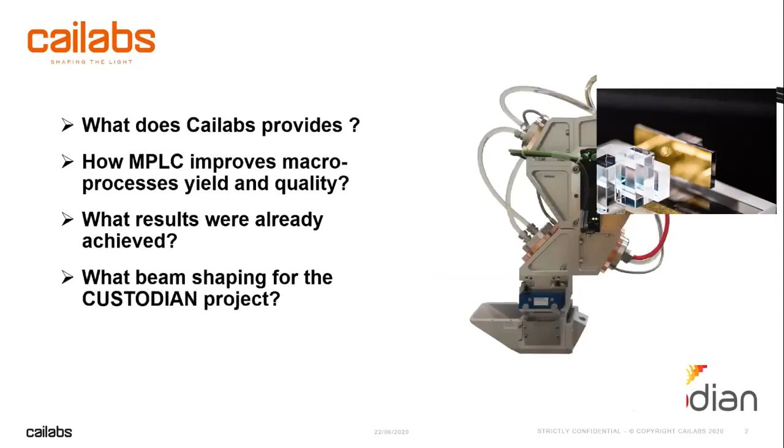So I will just shortly tell you what we at Cailabs provide, because we are here to talk about beam shaping, but what exactly do we provide in terms of beam shaping at Cailabs? I will get into our technology and talk about MPLC and how it works exactly, and how we can improve the processes. I will also let you know some results that we have already got, which are linked to the Custodian project. And I will finish by saying everything we want to do inside Custodian and what we are already doing for each of the Custodian applications.

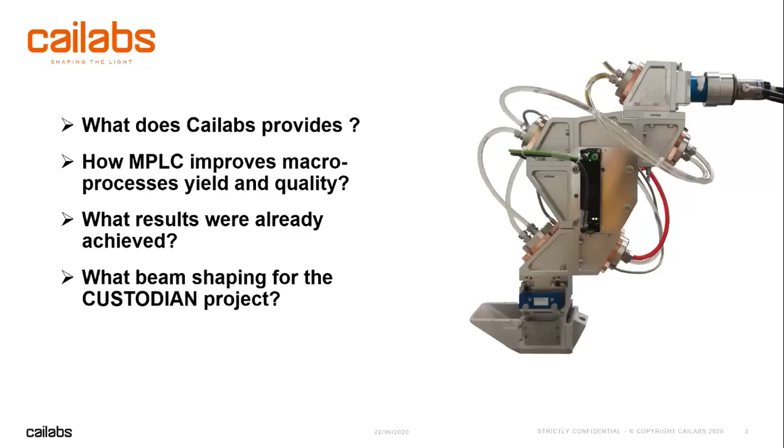So what does Cailabs provide? Well, most of you may not know us yet. We are a pretty young company. We are only 7 years old. We are based in the west of France. And we are a deep tech company, meaning that we want to really push the technology and the innovation forward. And we have developed a unique technology, which is called MPLC, for multiplane light conversion.

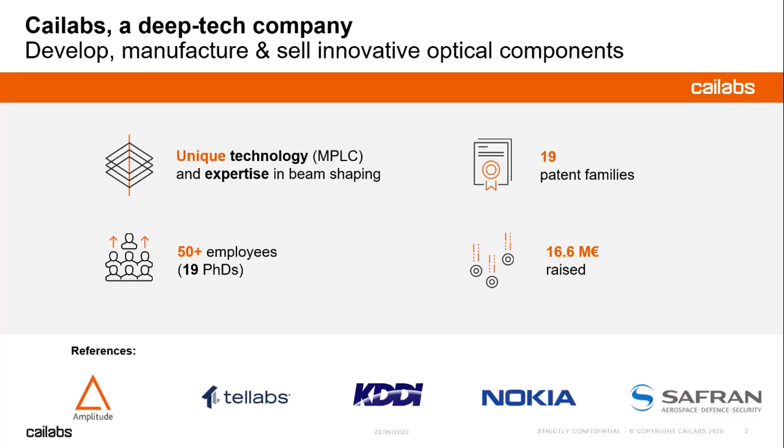We are doing beam shaping, but we don't think beam shaping similarly to other technologies. We don't work based on ray tracing. We don't work based on diffraction. We work based on mode propagation. So because it's very new, it's been patented from the beginning, and it actually enables us to do a lot of things in different applications. And many people did trust us over the years, and we did raise 17 million in the last years. So we are a little bit more than 50 now.

As I was saying, I will be quick on that, but this technology can apply to a lot of different applications. We have done a lot of telecommunication in the past. AROONA is for the local network, Proteus for the network of the future, TILBA for the telecommunication between ground and satellite, which is called free space communication. And in Cailabs, we have a lot of other applications like defense or biology. But today we are here to talk about material processing.

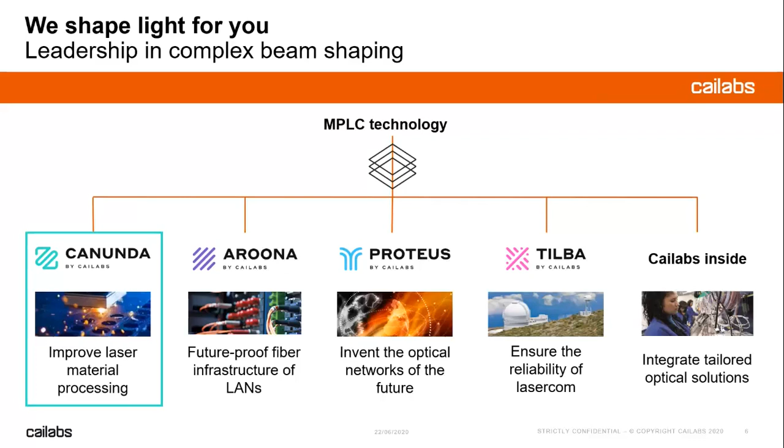So in Cailabs, we really want, with our beam shapers, to improve laser material processing, meaning whenever you have a laser in a factory or in a workshop which is processing goods, we want to look at it and see if we can improve the processes. So how do we do that? How does MPLC actually work for the improvement of the yield and quality?

Just want to quickly say that, depending on the process you want to improve, you are implementing systems which are very different. So today we are here to talk about high power applications. Everything that has been discussed is with CW high power lasers, meaning multi-kilowatt lasers. And in Cailabs, we call that CANUNDA HP. So today I will just talk about this product line and all the topics related to CANUNDA HP.

But we are also working on pulsed applications compatible with USP lasers or on Axicons for Bessel beam generation. And in every case, we are happy to discuss catalog references or custom development, as we are doing actually within Custodian.

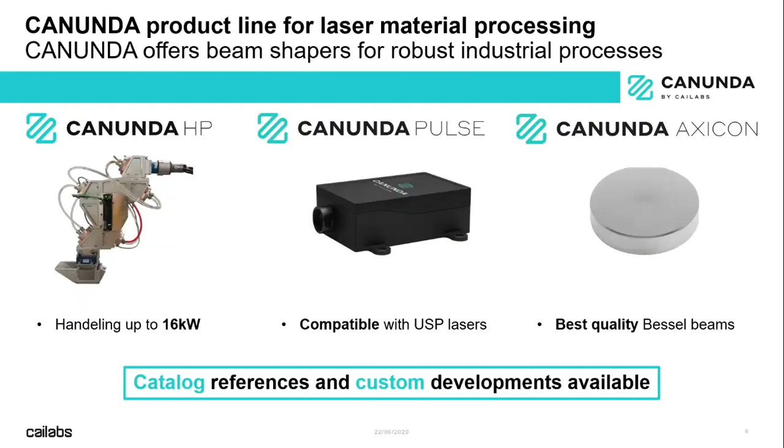Now, why beam shaping for material processing? It's been said already somehow in the previous talk from my colleagues. Actually, it's very important to have the right shape if you want to really improve any kind of process that you want to do. Here are just a few examples. For laser beam welding, for example, there is some literature. This shape is just an example, it's not the shape that we will apply in Custodian, but it's been proven that having a line and a dot behind is very helpful for laser beam welding.

In the case of Custodian, we plan to really eliminate most of the defects thanks to the beam shaping. For cutting, the shape is actually pretty different in the literature. You can have, for example, this dot with a C shape behind, and this is really improving the speed of the cutting. Within the Custodian project, we can target to actually multiply the speed by a factor of 2.

In additive manufacturing, the shapes which are looked at are pretty different. So it can be this symmetric shape. There are also non-symmetric shapes, just as my colleague from TU Vienna discussed. And the idea is actually to enable the additive manufacturing of new parts. So it's really to compare how to manufacture those parts with 3D processing compared to other technology.

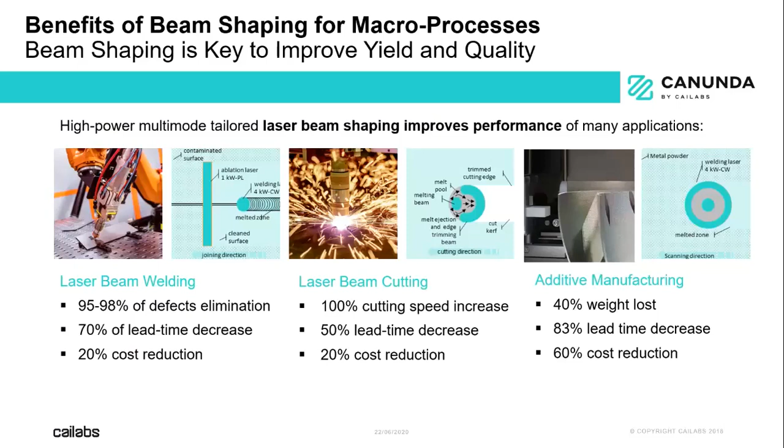What you can see here is that all the shapes are very different, very complex, and are actually non-symmetric. So they are not easy actually to make. And that's where we go to actually MPLC. If you want to do really complex shape to improve your processes, you have to be able to do really free-form beam shaping. And this is not possible with all beam shaping technology.

So what we do in Cailabs is multi-plane light conversion, meaning that actually you have a lot of planes, you have a lot of phase plates, and in between them you have propagation, as you can see on the bottom left of the screen. Because we have so many phase plates, we have really a good possibility to tune the shape that we will do with our system. So we can resolve complex equations in terms of intensity profile, meaning freeform. With a very high quality, we can reach the limit of diffraction in terms of quality.

And actually, which is very unique, we manage also to solve the equation of the phase. So we can have a plano phase where we have the shape. This is extremely important in terms of beam shaping if you want to have a robust process. Many beam shapers, they don't have a plano phase, and at the end, they have a very small depth of focus where you have the nice shape.

This system is fully passive, as you can see in the image in the middle. You don't have anything electronic to pilot it. It's therefore very robust and actually pretty easy to manipulate. Over the years, we realized that it was much more convenient to implement it in a reflective way. So that's what you can see on the picture on the bottom right. You have textured mirrors on one side, then another mirror in front, and the light is going back and forward in between both mirrors, being shaped slowly phase plate by phase plate.

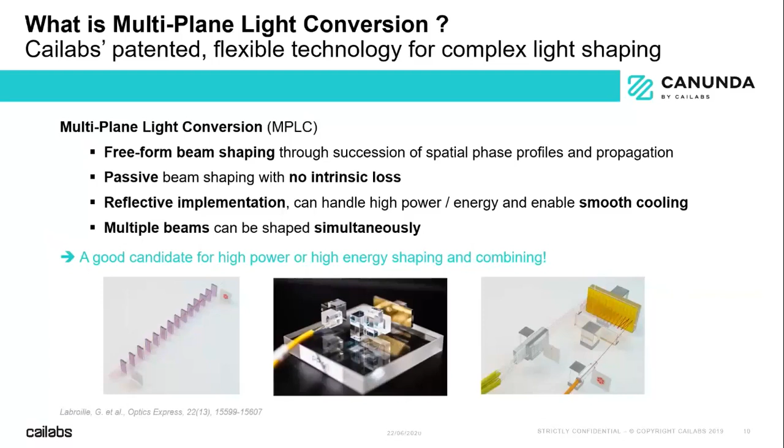One point which is actually very important sometimes for high power processes as well, we can handle multiple input and we can handle multiple output. So all this makes it a very good candidate if you want to do complex beam shaping to improve the processes. So that's what MPLC is actually providing.

Now, what results did we get already? So here actually you can see one system on the robot that we have developed, which is kind of a first step for the Custodian project. And we did manage to check a lot of different things with this system, which is very new. It was manufactured last December and tested for the first time in January. And we have some more tests with a similar system scheduled for this week. So we are really working on that to improve our design.

The idea of that system was to improve laser beam welding with a simple shape, and actually mainly to make a compact system. It's the first time at Cailabs that we do such a compact system, integrated in a robot. About a year ago, we were only doing R&D on optical benches, so it was a big improvement which we are quite proud of.

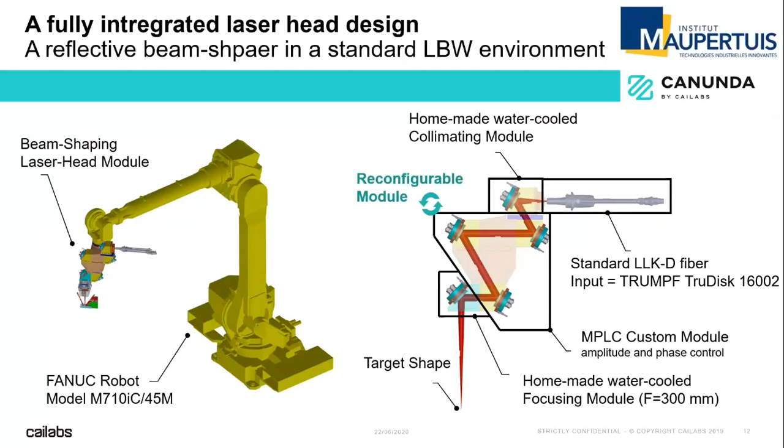We tested that with the Institut Maupertuis, an application laboratory in the west of France as well. The idea was to have a collimating mirror at the beginning in front of a standard LLKD fiber input. At the end, you have a focusing mirror, and in between you have the MPLC, the mirrors which do the shaping of the beam.

I'll go quickly through a few technical parameters we managed to achieve with the system. We had a very nice transmission, more than 99%, which was actually within the measurement precision of the system. We managed to preserve the BPP before and after the shaping, which is also very unique to MPLC technology. We also managed to reduce the focus shift.

I remind you again that this was the first time we had such an integrated system, and we already got very good results in terms of focus shift, thanks to the cooling down by the back of the optics. We plan to get even better results than that very soon. We were also able to handle really high power, and beam shapers handling 16 kilowatts are not that numerous. We were very happy to manage to handle 16 kilowatts for laser beam welding.

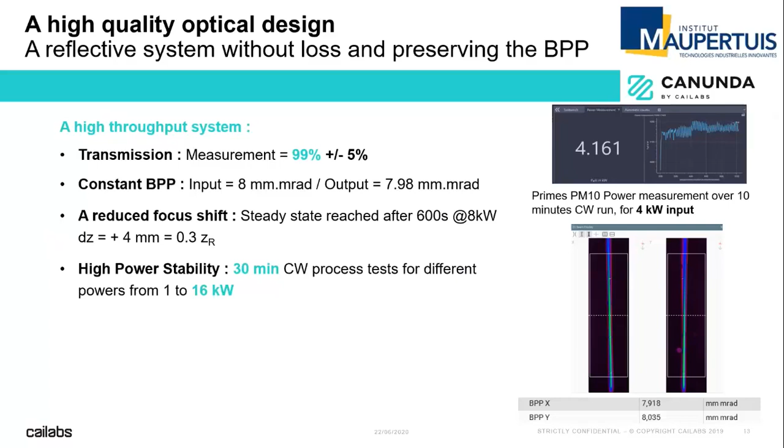Here are some of the process results that we got. You can see the video. I was also very happy to have this nice video. You still have some spatters, mainly because we don't have a protective gas shield in the system yet, didn't have time to implement it. But it was actually the first weld we did with an MPLC, and we were very happy with the quality of the weld, which is already quite nice. And as you can see, it's already integrated in the robot.

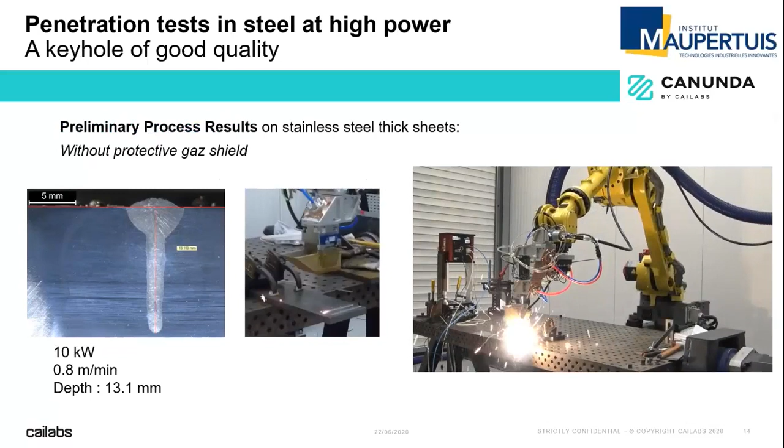So what about beam shaping for the Custodian project? I guess that's the most important part of my talk now, but everything leads to that point, and you will see the link with what we just said before.

One of the huge challenges we want to tackle with Custodian is dynamic beam shaping. It's not easy to do dynamic beam shaping, but if you want to adapt the beam during the process live, as my colleague just explained how important it is, you have to have some dynamic parameters you can use. What we want to do is based on what we call the parameter transfer feature, and it's already been proven to work well.

In the past, you have the paper named at the bottom of my slide. What you do is, for example, change a tilt at the input of the MPLC into a defocus at the output of the MPLC. It can be any kind of other parameter—you can change a tilt at the beginning of the MPLC into a shape dimension change, for example, or into the distance between the shapes that you will change. Everything is somehow possible, you just have to look into the details of what you want to do. On the right, you can see an image of what has already been done with multiple inputs, demonstrating the capability to do a dynamic system.

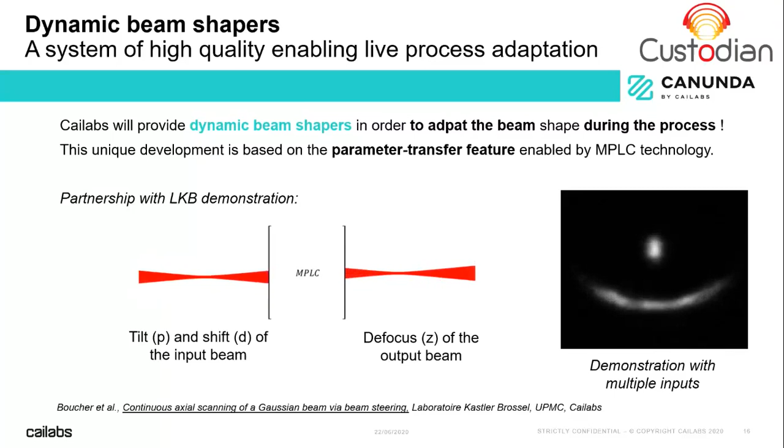Now let's talk application by application. The challenge of beam shaping for laser beam welding—there are many challenges, but I would say one of them is to be integrated in a laser head. That's why we did this project with Institut Maupertuis before, because it was a huge challenge to make something that can be integrated in a robot, which is compact, light, and can handle the speed of an arm robot.

So we are very happy that on that point we did actually good improvements. We have to be compatible with a Precitec welding head, and it has to be an add-on which is easy to integrate. So it's a challenge that we have to meet as well, but we are already working very well within the Custodian project to tackle that point. Now it has also to integrate an inline control of the process. It is also a challenge, but this will be discussed later on during the webinar.

The shape that we will target is a complex non-symmetric shape. This is difficult, and not all beam shapers enable that. So the idea is to initiate the melt with, as Rodrigo was mentioning, a first point or main beam, and then to control the melt pool with a secondary beam. All that we will do while preserving the high depth of focus, which is extremely important if you want to do welding through a large, thick material. And last but not least, this has to be dynamic so that we can adapt the process live. So it's going to be a very nice shape that we will do for laser beam welding.

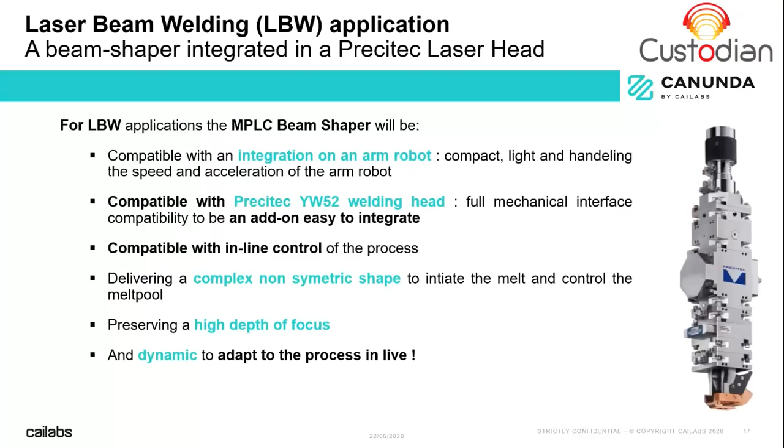For LPBF application, the challenge will be very different. We don't have to be integrated in a laser head, but we have to be integrated in a machine. On the bottom right, you can see how we plan to do that. We will have to have a very long propagation, and we will have to have a very flexible system in order to test different shapes. As you saw also on Rodrigo's presentation, there is actually a huge number of possibilities which can work for LPBF. So we try to have a flexible system which enables testing different shapes to improve the process. Again, we will preserve the depth of focus, even if it's actually less important for LPBF than for laser beam welding. And it has to be dynamic for the live control of the process.

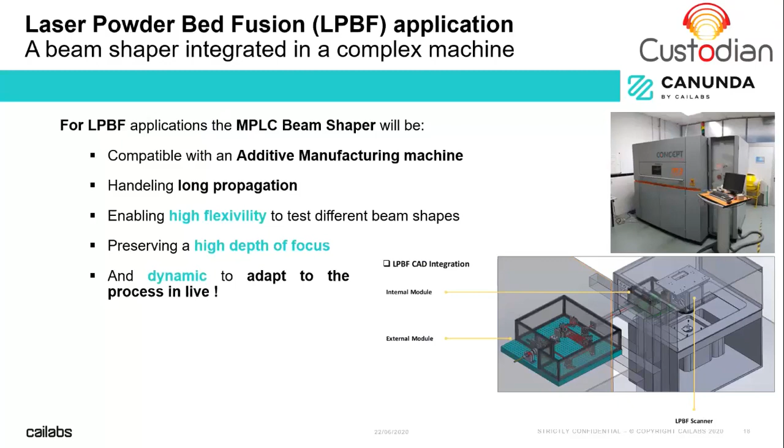And on that specific case, we will have very nice results probably next month. I would suggest that you follow us on the LANE conference, the Cailabs conference, to see the latest results this fall, including an online high-speed X-ray imaging, which will be done by Precitec, and we are really looking forward to this test, which has to be done in September.

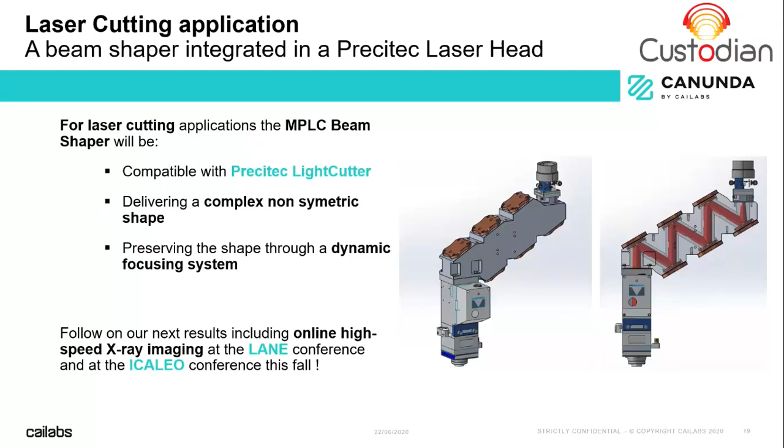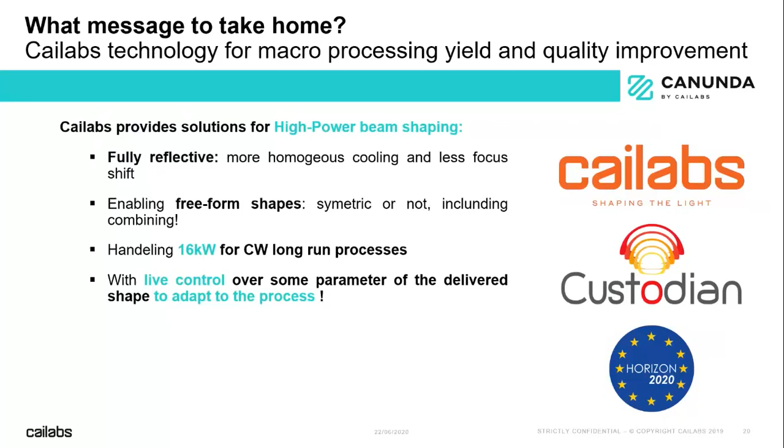I tried to explain where we got from and where we want to go within Custodian, and I will be very happy to answer any questions that you would have.